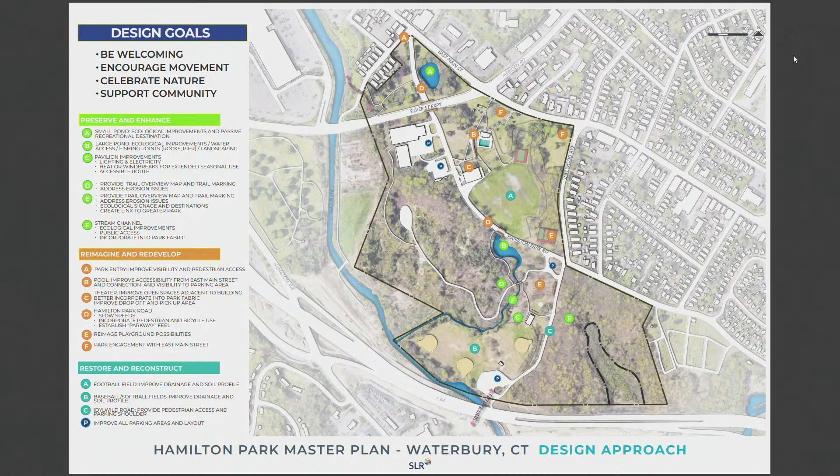So that's one of the reasons we're back here today, to hear more from you all. We appreciate you coming out today. You may recognize some of these images as well. We showed a series of images of existing conditions on site.

The park has a slew of facilities. It has a lot of great bones to it. We understand a number of them have maybe not been maintained as much as they could have been over the years. It's a large acreage and has a lot of monetary investment needed for it. So this is really a chance to look at what can be refurbished, renovated, reused, and what needs to be recreated or reimagined.

But there is significant history to the park, significant structures, and things that we want to enhance and really highlight. I think you all know that better than anybody. So we'll be utilizing a lot of the bones, a lot of the great features of the park, in the master plan vision.

But we also showed you what the park could hold, what activities it could be utilized for in different sections of the park. Everything from athletics and fitness to play structures, playgrounds, the natural environment of the park, and how we can incorporate play, fitness, and athletics into some of these natural areas or the fringes of them.

And then again, how does it all fit within the community itself, whether it's artwork, historical artifacts, or educational opportunities.

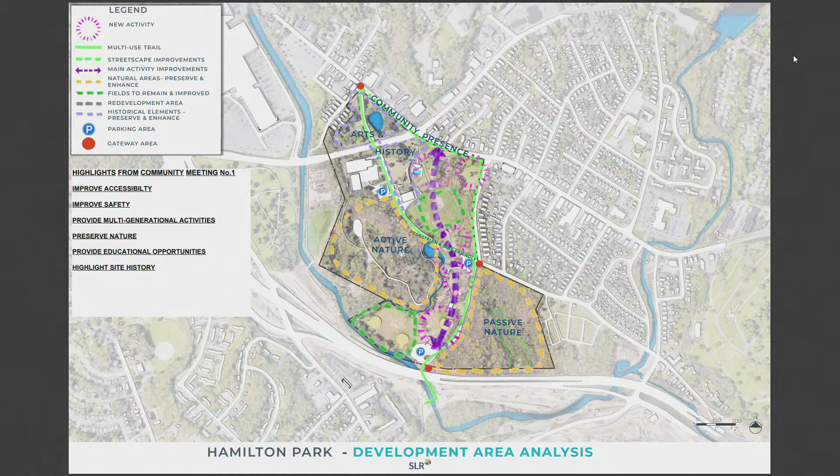A lot of responses said, we're there for 15, 20 minutes and then we leave. So we want people to spend more time in the park. And finally, providing educational opportunities and highlighting the site history were the key highlights from the discussions that came out last June.

And so today, what we're here to present, and as I said, Suzanne will walk you through the details of this plan, is what we would consider a roadmap or a vision for the park itself. It's detailed enough to give an idea of what can happen in these spaces, but it's not so detailed that it's set in stone exactly what will be constructed.

Each of these areas that we'll discuss can be divided up into multi-phases, multi-projects, and then those would each get detailed, designed, and brought to construction.

So beyond this meeting today, beyond the 30 days of comment after this meeting, there's still going to be a good amount, years to come, of interaction that the community can have with a variety of designers. I'm sure it won't be just SLR, that you can help us form this park and really create the future of it.

So Suzanne's going to walk you through the map here. We do have boards on the side. We're hopeful that you can come up after the discussion and get a closer look at them. We'll be here as long as you want us to be to answer questions. And I'll turn it over to Suzanne.

Thanks, Mike. Can everybody hear me okay? No. Okay, I'll just lower it. How's this, better?

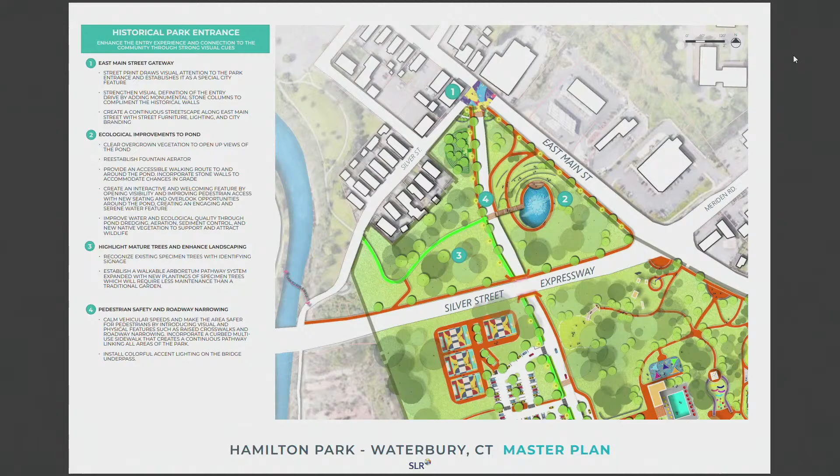Area 4 refers to pedestrian safety—we'll talk about the Park Road in more detail on the next slide, but one issue now is that cars use this road as a cut-through. They travel very fast and the sight lines aren't great. There aren't continuous curbed sidewalks separating people from vehicles, which is critical to improving a person's enjoyment of the park and creating a sense of safety, knowing you're separate from vehicles that aren't going to be coming around a curve at 50 miles an hour. So this will include a recommendation to narrow the road, create a pedestrian sidewalk, and add street lighting, so there's a sense of safety and security in this part of the park.

I'm going to move to the next slide, where we did some vignettes because plan views aren't always clear—you can look at a plan but not quite visualize it. Our graphics are very bright and colorful, so they're not literally exactly what will happen, but they give you the feeling of what we're going for.

This is the existing view coming down East Main at Hamilton Park Road, and you can see the overgrowth of vegetation surrounding the pond—you can't really see it. There are historical stone walls, which we would preserve, but we think we could highlight that by adding another bank of columns or piers or something that makes a statement. There are also improvements we'd recommend for crosswalks, maybe doing street print. In a lot of urban areas with traffic, at an important intersection, you can do artwork on the road done by local artists. There's professional paint available that lasts several years, creating a statement that this is the entrance to the park.

So this is the vision—showing a crosswalk that's brightly colored, similar to what was done on East Main Street, to put a visual in front of drivers' eyes. The street print graphic would also capture drivers' attention, since East Main Street doesn't have a traffic signal at this time. Here, putting some cobblestone potentially at the driveway to slow cars as they're coming out, opening up the view to the pond with the new aerator and clearing the vegetation, adding street lights, and establishing that character to this location.

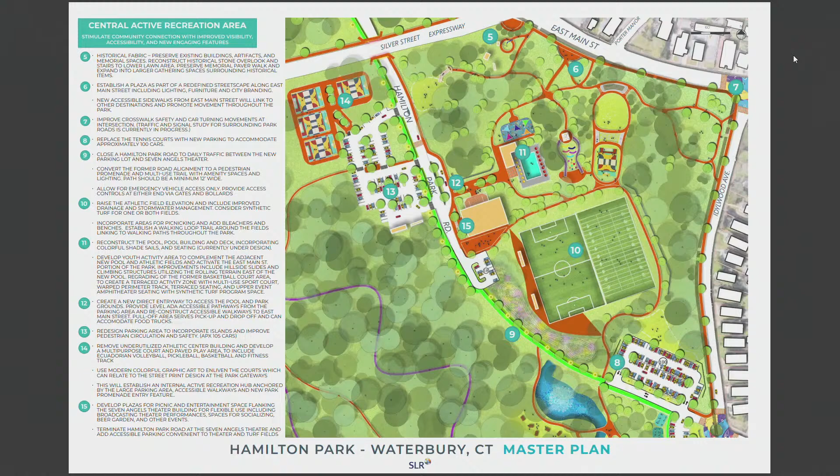Number 14 is where the current sports facility is located, with indoor soccer and lacrosse. We've discussed this with the city, and the recommendation is that because this site has such limited flat land, and while it is a benefit to a lot of people - I know my son has actually gone there in the past - it would provide a better benefit to the neighborhood and community if we could consolidate the sports fields or courts in this area.

There could be a fitness track, multi-purpose courts, different types of pickleball, basketball, Ecuadorian volleyball. That design would be something we'd discuss with the community as far as what types of activities you would want there.

But that's a good location for courts, and it's easy to see from the road. So for security purposes, if the city's police department is cruising through, they can easily see what's going on. And that keeps it away from the residential area where it might be a little more noisy. So it seems like a very good location for that, and there's ample parking as well.

Number 15 is the Seven Angels Theater. I know that building does need a lot of interior improvements, but externally what we're looking at is improving that back terrace when we create the connection to the proposed pool. That would allow the theater to have space that could be used for events, if there's overflow for maybe a cocktail party or something beforehand.

Some of the vignettes we're talking about, for number 6, we're looking at the existing view of East Main Street. One of the recommendations that we'll be addressing pretty quickly, or the city will, is removing the dead trees and limbs that are there, which are unsightly and dangerous.

We're looking at a proposed front porch type of plaza space, where the bus stop is, doing some street print, narrowing the road a little bit. People tend to slow down when that happens because it gets them pushed into a narrower area.

Adding a bus shelter, the traditional city street lighting with the banners. Those banners could have the city's logo on one side, and if there's something special that the east side has for a logo, that could be added as well.

Cleaning that up and creating a welcome spot that you can actually enter, with new pathways that will bring you down to the pool and into the other areas of the park. So you don't have to necessarily come in by car on that main road. You can easily come in off of East Main Street on foot or by bike.

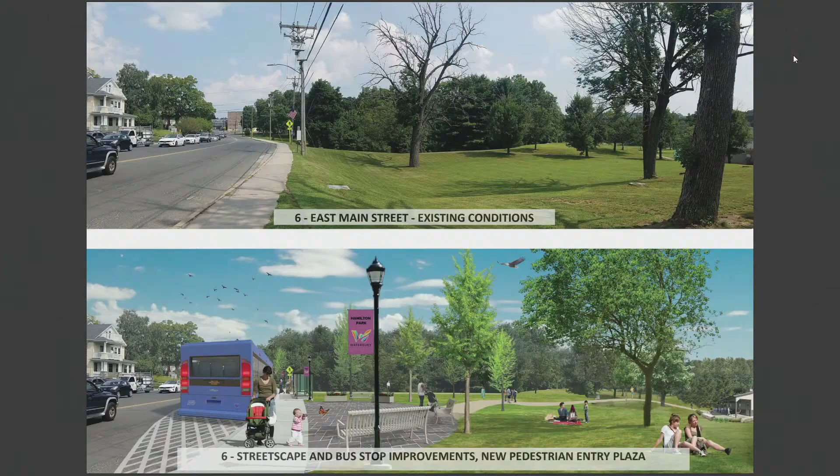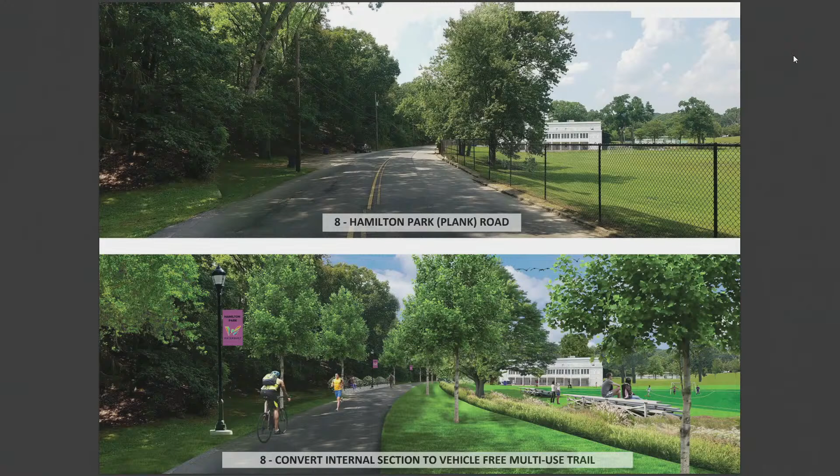This is the vision for the Hamilton Park Road, where it would be closed. Currently, you've got cars whipping up and down, and it's not that welcoming for pedestrians. You kind of have to walk in the ditch on the side if you are going to go anywhere, or cars are just parked on the side of the road, so it's not that pleasant.

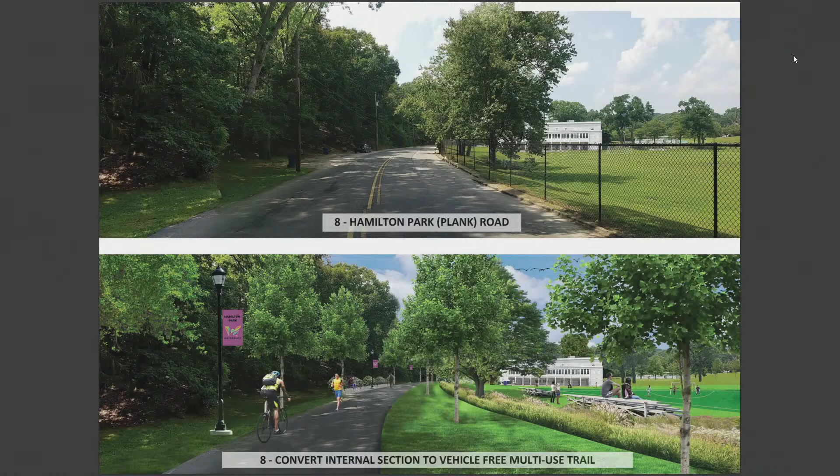So our recommendation is to turn it into a pathway just for pedestrians and cyclists, which creates a sense that you can relax in that space because you know nobody's going to come through. It would have removable bollards in case of emergencies, so if an emergency vehicle needed to come through, that would be accommodated.

All of these discussions include lighting, bringing that in so the areas that are most heavily used would have some security with that - emergency blue phones, potentially a security guard booth somewhere in the park. Those little details aren't necessarily covered in the master plan discussion, but that would all be wrapped into that.

I've spoken to people who are using the pool who said they had family members that couldn't make the walk, and they could not use that pool because they physically just couldn't get to it.

So in order to resolve that, the grade of the street is actually similar to the grade behind the pool. There's that little hill that's going by, but nothing that a little 3-foot wall or a 2.5-foot wall on either side could accommodate.

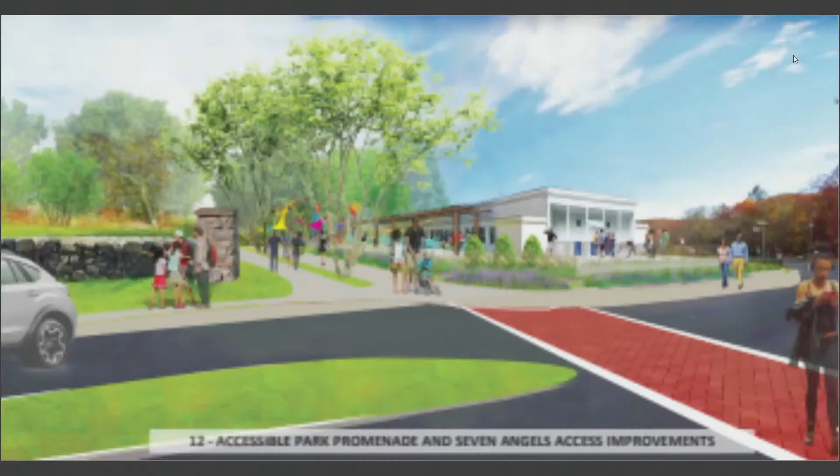So removing this hillside, putting in some low retaining walls, and just creating a flat level path that's immediately adjacent to the parking area would make it much easier and make you feel like it's an entrance to some place.

You don't have to search where you're going. You don't have to wonder how do I get to the pool from the road. So it's also accessible to the theater and to the sports fields.

And then the basketball courts would be behind us. But this would also provide some additional space for the Seven Angels Theater to have for events that overflow outdoors. We would improve their accessibility in and out of the theater.

Moving down to the southern portion of the park where the duck pond and ball fields are, we're looking at improving the parking, which exists at number 16. Right now there's just a little horseshoe pull-off space. It's kind of just dirt, not well organized, and we know we can fit at least 25 cars in there, but the way it is right now, maybe 8 or 9 can get in there because they just park all over. So formalizing that creates another entry point that tells you that you're entering the park.

I'll show you a vignette that shows what happens as you move from 16 into 17 and 18. 17 is obviously the duck pond, which is one of the most favorite places that everybody loves to go.

Have a little bridge or stepping stones or something that goes across the water, allowing anybody, not just children, to actually get their hands into it and close to nature and see what's there, because I don't think you necessarily even know that there's a resource there, or if you do, it might be overgrown or full of trash, but if certain areas can be cleared out, that would allow people to access it and appreciate it.

Area 22 is just a continuation of a green line that's weaving through the entire park, which would be a constructed walkway that people can walk on outside of the road. So it would be a curbed, separated path that could be used for bicycles or pedestrians to get through the different areas of the park. And Area 23 is the ball fields.

I think the lower two right now are primarily being used for cricket, probably baseball as well, but in Area 23 where the softball fields are, that is a potential location for an ice rink, whether it's a temporary seasonal thing or something more permanent, with the stone house right there. Once we bring power to it, there's potential for having services in the wintertime that maybe something valuable to the community.

Again, all of these are areas we see potential for, and once we get into funding sources and putting a hierarchy on what is done at what time, we will be coming back to the community to feel out what's valuable to you. Is this something that you want? So this is just a potential location that makes sense for something like that, which I know the park has had in the past.

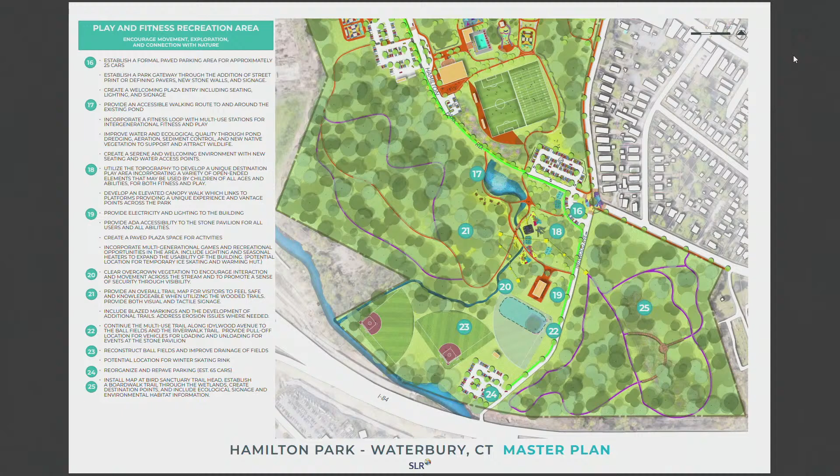24 is essentially just reorganizing the parking area and making it a little more efficient. 25 is where the bird sanctuary is, a beautiful naturalistic area filled with ferns and vegetation that isn't invasive - things you'd find out in the middle of the woods in New Hampshire. It's a great opportunity if those trails are marked, with a sign at the trailhead showing a map of where you can get in and out and what destinations there might be - that will increase usage by people who appreciate wanting to take a walk through that area. And with the educational opportunity, there's an enormous amount of little trails or destinations that can be found by different people interested in doing that.

And the destination playground could be - there's so many ideas for what that can be. A lot of times it's building things into hillsides, making scrambles and doing things with stone and wood that are more flexible and open-ended for kids to enjoy. It's not kid-friendly exclusively - there are things that grown-ups and everybody can enjoy in these types of playgrounds as well.

Here's the duck pond, and as we mentioned, it's a very popular location in the park. So dredging the pond, cleaning up the banks, doing bank stabilization, removing some invasive material and replanting with native vegetation, and creating a pathway that's stable and level that people can walk around and enjoy, adding some benches so people can sit, maybe some rocks or a little deck that juts out over the pond so you can fish, you can feed the ducks.

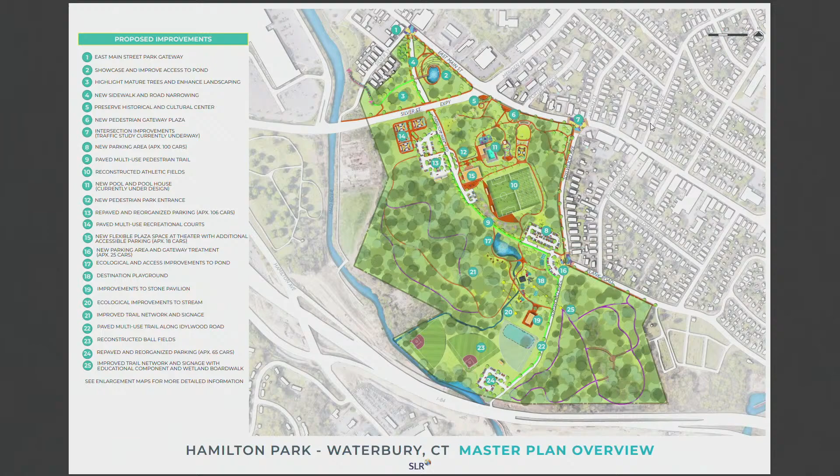So your vision is it won't be that hard left off of East Main because you've got one road coming out. We're looking at that whole area — it's kind of a funky situation. You have one way out and around, and I think it's exit only at the corner. We could take all that into consideration to see what makes the most sense. Adding a traffic light potentially is also an option, which would clean it up because you'd have to stop and make left or right turns at the time.

Okay, thank you, but it's a good point. Thank you. Yep.

Thomas Peltier, Park Commissioner with the City of Waterbury: I just wanted to commend you guys on this plan and listening to you. A lot of what was said here tonight is what the community has been calling for quite some time. It is one of our largest parks in the city of Waterbury, and it's going to be a showcase for the city.

I don't want to get Mike Salvio upset — I know Fulton Park is my favorite park where I grew up, but coming into Waterbury, Hamilton Park is the first thing everybody sees.

This administration has been committed to parks since it took office, working with our state, federal and local delegations. They're going to do everything they can to make sure this project gets done. It's one of the main reasons why when I was asked to be a park commissioner, I signed up, because I know this administration is a man of its word and it's going to get done. It takes time — this is one of the largest parks in the city, and we've got to make sure it gets done right the first time. It's what the community's been asking for quite some time. No administration in the past has taken on this endeavor, but this administration, I'm sure, is going to get it done.